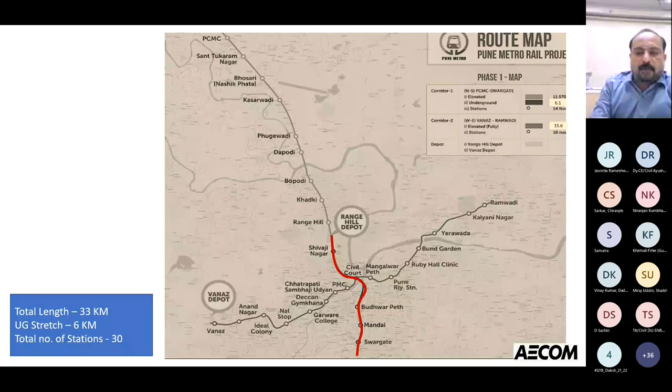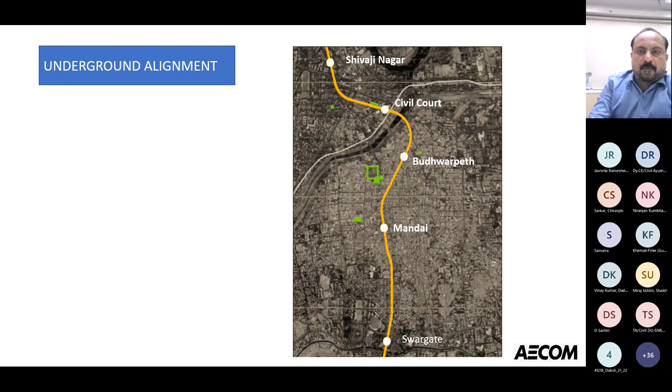So this is how the alignment looks like, the underground alignment in the Google map. You can see that the first station is Shivaji Nagar, followed by Civil Court, and then Budhwar Peth, which is flanked by Mandai station on one side and Civil Court on the other, and the last station is Swargate. At the end of this, after the station, we have a stabling line because it is the end of the corridor. From the Google map, you can see that almost all the stations are located within the vicinity of major and critical buildings.

And you see the station locations: one station is on road, some station is off road, some station is located in the midst of critical and dilapidated buildings. One station is located in a quiet residential area, and one station is located in a market yard. So that is one aspect which makes them different. And the construction access - normally a regular underground station will have 2 or 3 levels, and you follow a bottom-up or top-down construction sequence, using a regular cut and cover methodology to construct the station and backfill.

But here we have stations where we don't have access to build the station. So basically we have split the construction into cut and cover and NATM. NATM is a new Austrian tunneling methodology where we excavate from below into the rock and build the station. So we don't have access from the top. So we do a cut and cover, go to the bottom, and start constructing the station in the horizontal direction.

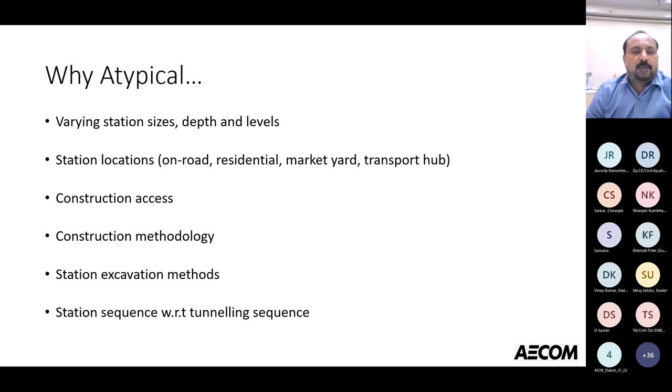Construction methodology is one thing, the cut and cover and NATM, and also the excavation methods. Pune Metro is basically a hard rock area where we had to resort to blasting methods, controlled blasting, and in some stations we could do normal excavation with chiseling. Based on the rock condition and hardness, we deployed various excavation methods. Also, because of the tunneling sequence and delays in land handover, tunneling proceeded first in certain stations, and we had to build the station around that sequence. So different stations have different methodologies and sequences. That's the reason why I'm calling them atypical.

The specialty of the station is, as the name suggests, Shivaji Nagar. The client wanted the entry elevations representing Shivaji Maharaj's culture. So the entry elevations are so designed that it has a historical flavor. And the connectivity of the station with other transport hubs is also one of the peculiarities in this station.

Next comes the Civil Court station. It's the deepest station, with the rail level at about 28.8 meters. Because we had such a deep station, we could add 3 or 4 levels into it, making it a 5-level station. So it's the deepest station, built with the cut and cover methodology.

The specialty of this station is, we resorted to it being basically an interchange station. It is also connected to the elevated corridor. And it's in the vicinity of the district court. It's also near line 3, which is in the proposal stage for Pune Metro, corridor 3.

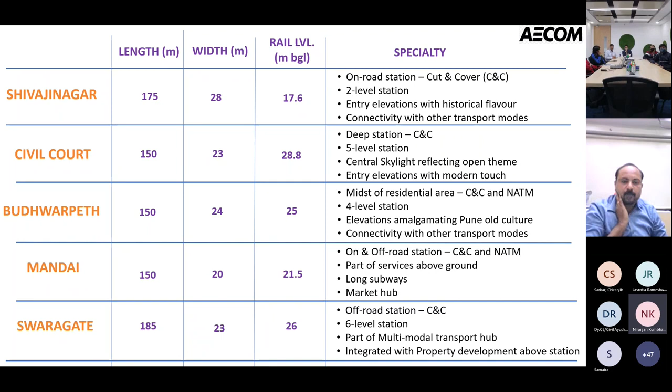The last station is Swargate station, which is again an off-road station. The rail level is 26 meters, and the length of this station is the longest, about 185 meters. It's also strategically located where you can connect to other transport hubs, like the state transport and other options. We also have some property development above and around the station. So if you see this slide, you will understand that each station is so different from the other.

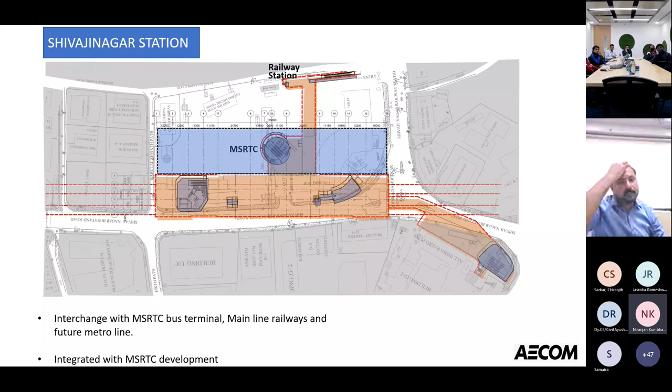This is the first station, Shivaji Nagar. The red highlighted area is the main station, and the blue highlighted one is the MSRTC, the Maharashtra State Road Transport bus terminal. It's connected with this terminal, and the entrances are designed so one goes to the railway station on top, and another is near an AAR establishment, a government office. The specialty of this station, though it's a regular two-level underground station, is its connectivity with the state transport and the railway station.

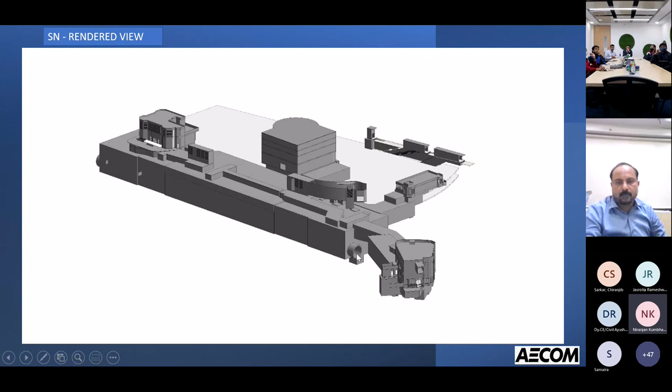This is a Revit 3D rendered model, which gives an idea of how the station will look. Though it's black and white, it gives an idea of the 3D-ness of the station. This is the entrance AAR, and this is the other entrance connecting to the railway station, and this is the interchange point with the state transport. This is the two-level station, and you can see the tunnels connecting to the end wall of the stations on either side.

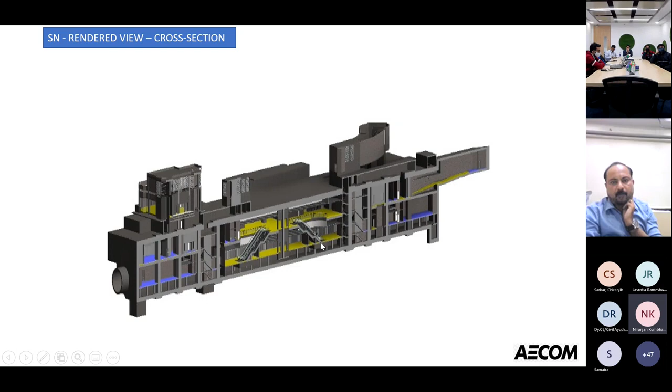This is another view of the same station, a cross section cut through the 3D rendered view, created in Revit. You can see the main public area, the fare office, and the entrances leading people from the concourse to the platform. There are some shafts going above the station, and this is the ancillary building coming above the roof slab. Partially all this area is under the road.

We have adopted a historical flavor in the elevations. These are the proposed elevations for the station, with about 3 entrances. You can see the historical tinge, like the forts in and around Pune have this kind of color, texture, and shapes. The circular or dome shape is picked up from the Pune forts.

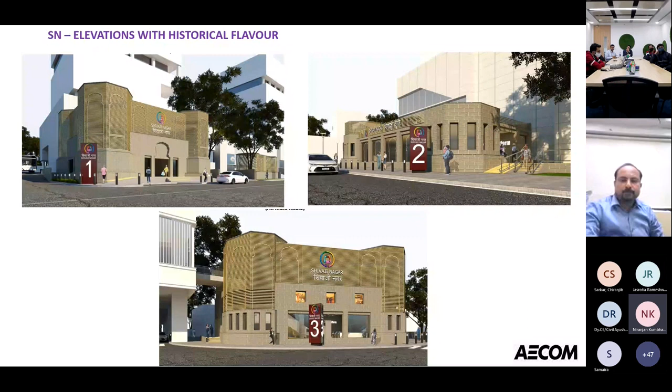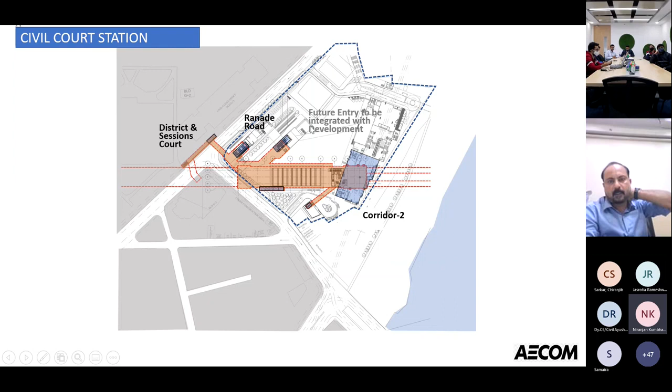The next underground station is Civil Court. This is also better connected. As I said before, this is near the district court, that's why the station is called Civil Court. We have entrances leading to the nearest roads, and some future entrances planned for future development.

This is the cross-sectional view of the station. The rail level is about 28 meters below ground. This is almost the plinth of the ground level, and this is the rail level. We have levels 1 through 6: the undercroft platform, mezzanine, 3 mezzanines, concourse, and the roof level. Because the station is deep, we could add some levels, and at some levels we are reserving spaces for property development.

The main theme of this station is that we wanted a grand look. All the area in the middle, about 50 meters long, is open to the sky, with a skylight arrangement at the top giving an open feeling. There's a mid landing through which the public will reach the platform from the ground level.

The only problem was with the structures. We had a structural design challenge because of the long, deep retaining walls, due to earth pressure at about 30 meters below ground. These walls have to resist earth pressure, with little lateral support, which we got from some struts at the top and the mid landing level. These walls are quite thick, about 1.7 meters at the bottom, with varying thickness at the top. Architecturally we wanted it to look grand, but that posed some structural challenges on the design.

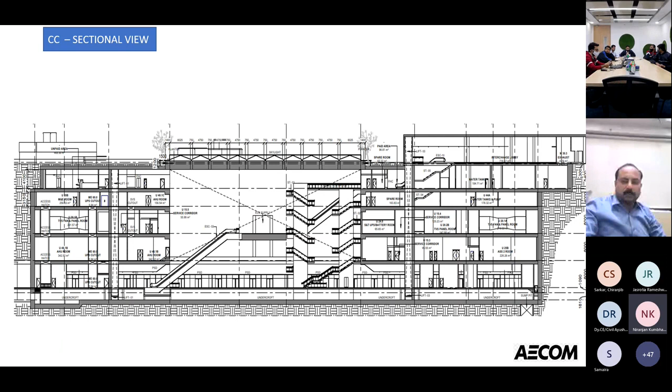Yeah, this is the 3D view which you can see. I can briefly explain. Actually, we have a crossover in front of the station, and there is no access from the top, so that's the reason we built it through NATM methodology. So this is the crossover, and the station starts from here up to here, and from where the tunneling starts.

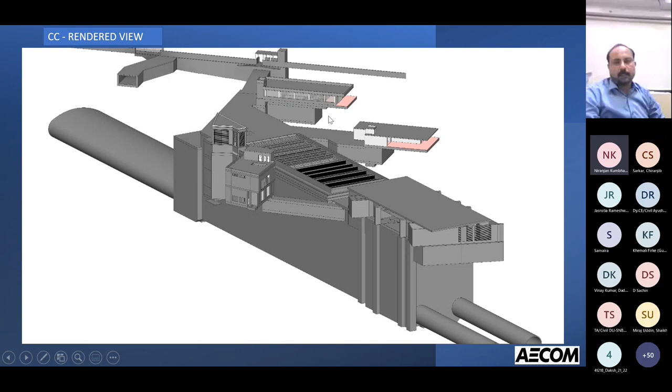And this is the skylight which gives an open and grand look at the center. And these are the entrances which are connected to the district court, and the subway is connected to the nearest court and the future development. So these are some other views, better view on the right.

You can see the openness, feel the openness in the station. So the people getting down from the ground will come to this mid landing level, use this winding staircase or the escalators, and go down to the platform.

So yeah, this is the view of the skylight at a certain angle. That gives you some openness. And this is the view which is cut through the 3D model, which I've shown in the previous slide.

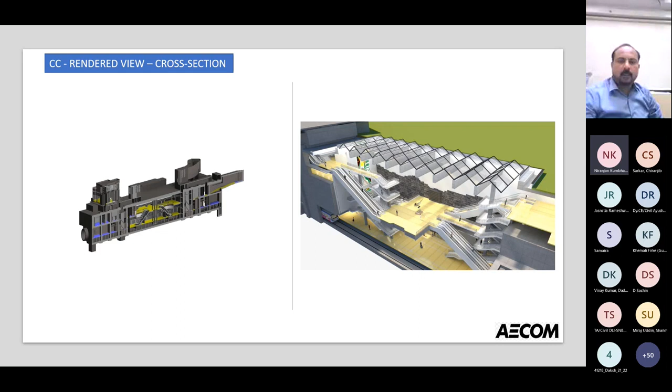So Civil Court station, this is the specialty: openness and a deep station, more number of levels. And within the levels, we could use it for property development and connection. So the entrances here had some design because we had offices close by and the district court and connectivity to the future development.

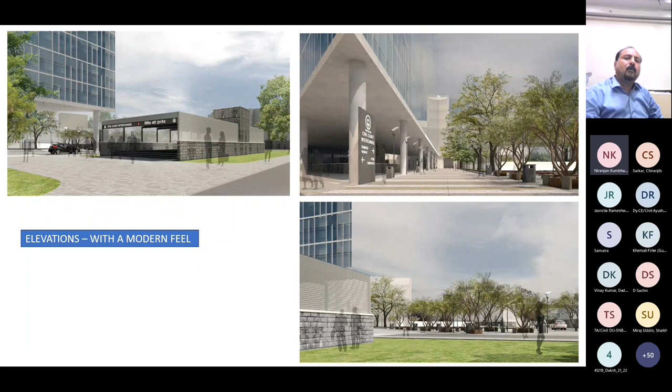The client wanted a modern feel to the entrances. So this is how these entrances were proposed, with glass and some open atrium kind of thing. So the previous station had historical flavor in the elevations, while this station had some modern feel.

Resort to controlled blasting because manual excavation or mechanical excavation would take a very long time. So we made sure that they adhere to the PPV limits for vibration and also the noise.

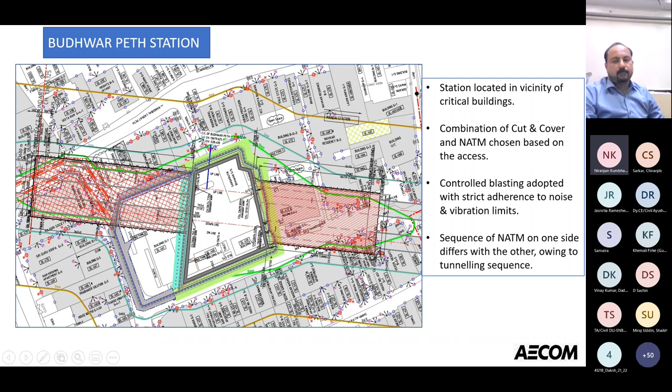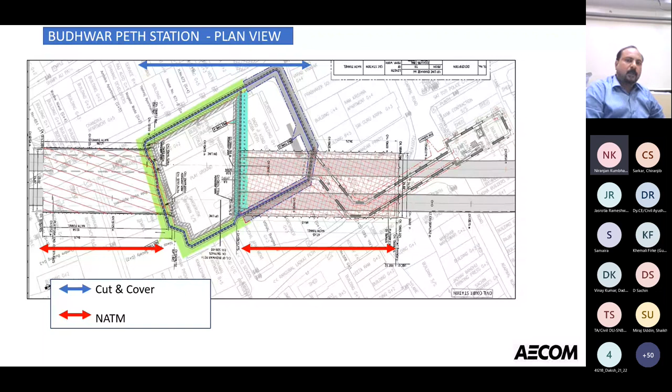Yeah, this is the plan view of the station. The blue portion is the cut and cover, where we could get some access from the top and build like a regular cut and cover with secant piles and going down to the bottom of sequence. And the red ones are the NATM portions.

So if I cut a section through this, this is how the section of the station looks. Yeah, the central portion is the cut and cover, and we could build some secant piles and dig up all the way through to the bottom, and then started constructing the NATM on either side.

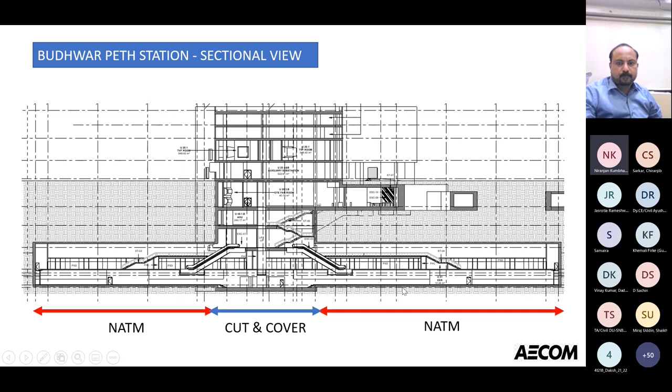Yeah, so this is the section which looks like in the NATM portion of the station. This is also part of the station, but because NATM's maximum depth is like 10 to 11 meters, it could only reach up to the platform level.

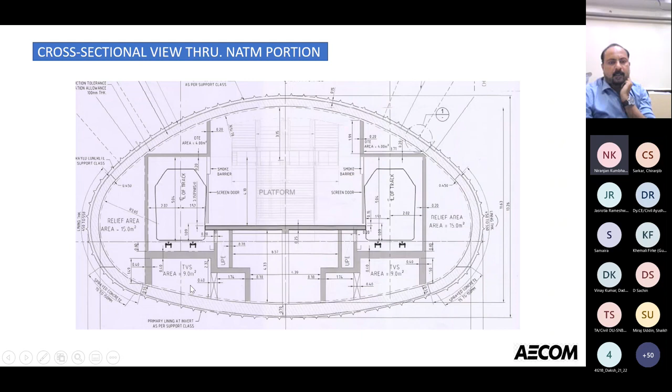So the difference compared to the other stations is that the platform, the track slab, is suspended in this case because we wanted to accommodate some TVS shafts below this track slab. Compared to other stations where the track slab is normally supported on the underground undercroft, this is the arrangement we have in the NATM portion: the platform and the suspended track slab, with the trains and the platform.

Briefly, I'll explain the sequence followed for constructing the NATM portion of the station. I won't go into details, just give you a brief sequence. This is the entire NATM shown in the previous slide, and to construct this, it's basically split into 4 stages: heading 1, heading 2, heading 3, and the benching.

This is the first stage where this portion of the NATM is targeted, and it's built with NATM taking appropriate support measures. Once this is done up to a certain extent, we build heading 2, and once that portion is dug and constructed with adequate support, heading 3 is done. Once headings 1, 2, and 3 are done, we target the bench and construct that NATM portion.

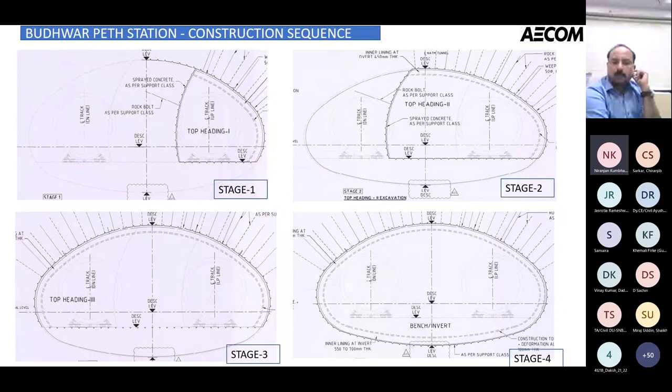So NATM basically has a primary lining, which is a temporary lining with shotcrete, some rock bolt supports and wire mesh, and we also have the permanent lining, which will be in concrete.

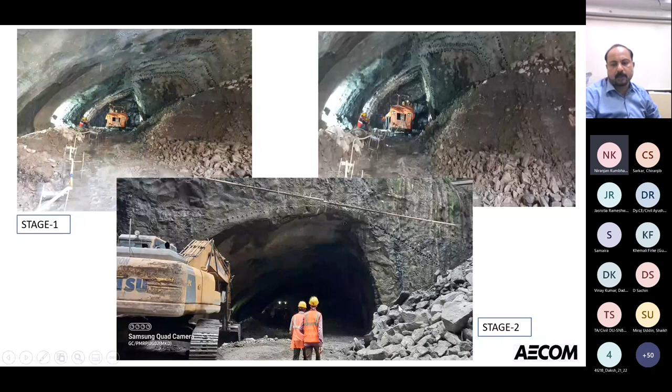These are some pictures which give you an idea of how the construction is going on. This is stage 1 where heading 1 is done for the NATM portion, and after heading 1, heading 2 is done, and this is the heading 3 portion which is yet to be constructed. These are work-in-progress pictures.

As I said before, because there was a delay in handing over of land, a certain portion of the NATM could not be constructed. One side of the station, one part of the NATM, could not be constructed in time, and the tunneling had proceeded before, so they erected temporary segments. Because of this, they slightly changed the sequence of the NATM.

This portion was constructed first, dug first, and the temporary segments were removed, and this portion has been constructed up to a certain extent. Once heading 1 is done, in the second stage heading 2 is targeted, and this portion was done to have some stability in the middle. This portion is constructed last out of the 3 stages, as heading 3. Once headings 1, 2, 3 are completed, the benching is done. So there's a slight variation in the sequence of the NATM within the station itself.

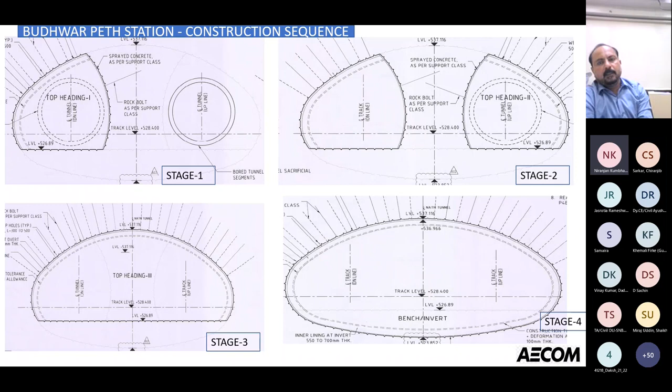On one side you have a straightforward 1, 2, 3 sequence for constructing the NATM, and on the other side we have like 1, 3, and 2.

This is the sequence for the other side. Once they start heading 1, they have the temporary segments erected through the TBM tunnel, which are broken out, and this is extended to build the NATM portion.

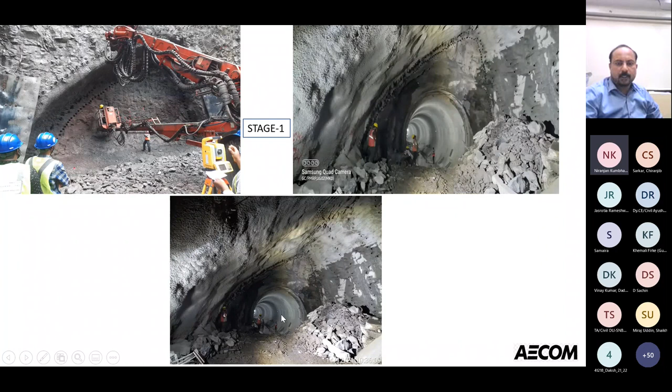Some more pictures show with more clarity the central column here. If you can see, this is the central column. This is heading 1, heading 3, and then this is constructed. This is excavated.

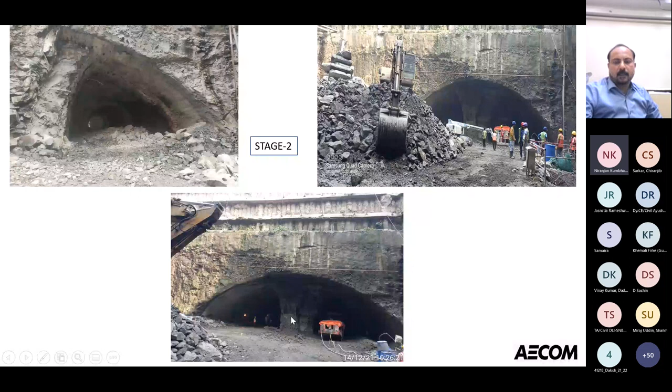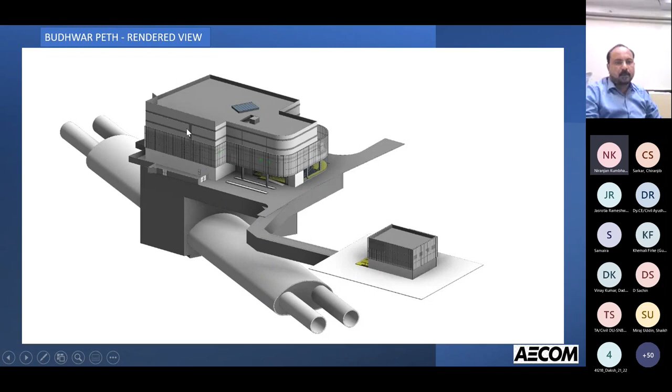This is another view, cut through the 3D model. You can see the tunnel getting terminated at the NATM, and the NATM starts from here up to the cut and cover portion, with the cut and cover box in the middle, again followed by NATM and the tunnel. There are some services above the building, and some property development is also proposed for the future, though it is shown in the model.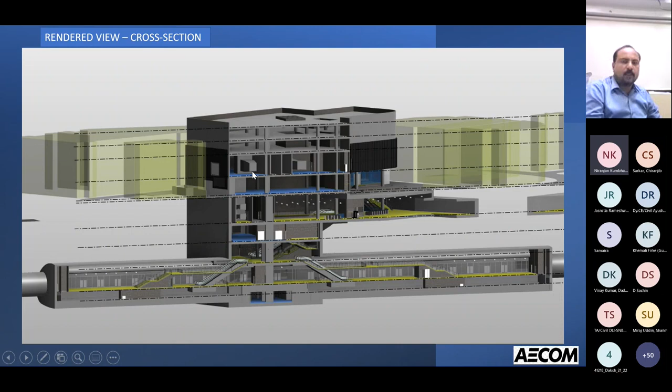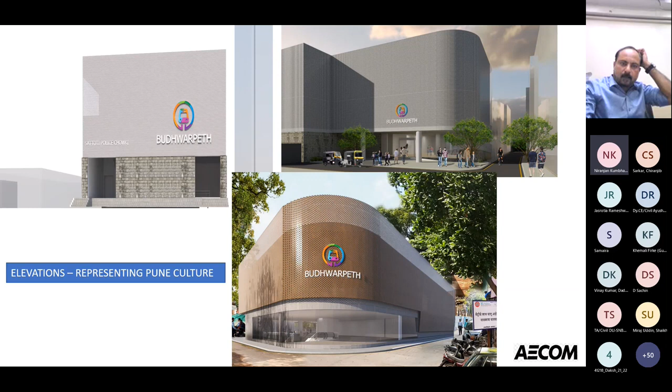These are only the proposals at this stage, though they may get refined further. So this is the elevation proposed for Budwarpet. The next station is Mandai station, which is almost like Budwarpet in terms of combination of cut and cover and NATM.

But the only difference is the cut and cover portion is split up into two, and it is also very limited. So you can see here, this is the whole station. This portion where my mouse is moving is the cut and cover portion, and also this is a cut and cover, which is followed by NATM to the right and to the left of this box.

This again, here you can see that there are a lot of buildings in and around the proposed station, and also a major market hub around the station. So here also the sequence of NATM on one side and the other side was followed, and the blasting and all were carried out with adherence to all the strict limits which we have.

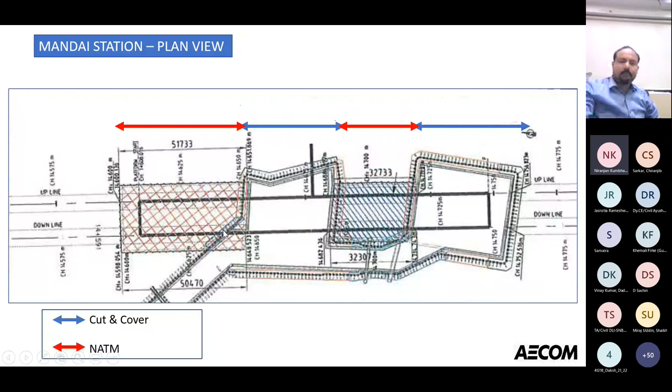This station, as I said, is also located in the vicinity of critical buildings and the major market yard. For building the station, we had to use a combination of cut and cover and NATM, and blasting was adopted, but with strict adherence to the limits of noise and vibration.

Also here, because there were some delays in handing over of the station lands, the tunneling proceeded before, and the sequence of NATM had to be modified around the tunneling operations. The other specialty of this station is, as I said before, the cut and cover portion - the boxes - the size is not same as what we had in Budwarpet.

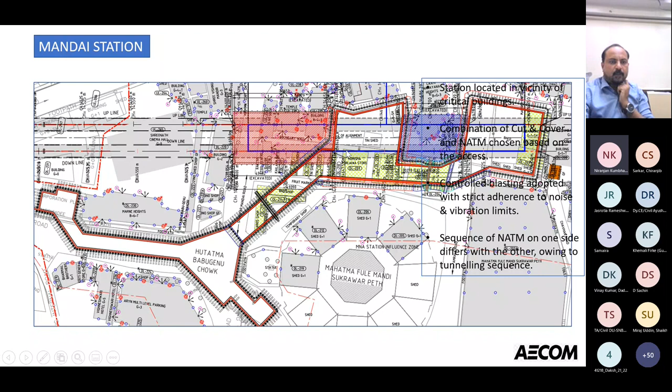In Budwarpet, though we had a small portion, the area was enough that we could accommodate all the services within the underground box. But in Mandai station, we did not have that luxury, so some of the services had to be shifted to the top. So this is like a partially underground and above ground station.

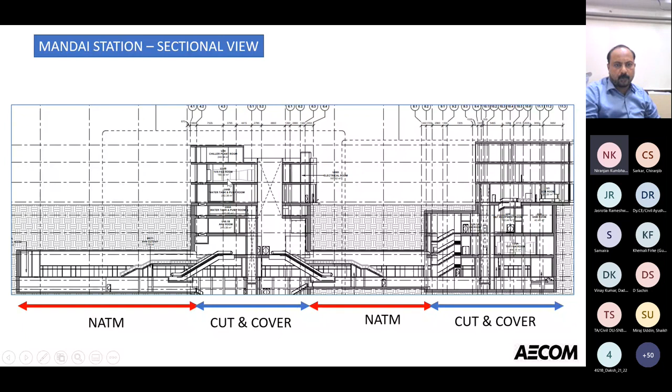Now this is the sectional view of the station. The middle portions, the blue portions, are cut and cover boxes, flanked by NATM on either side in red color. As I said, you can see the fans housed on the top floors, above ground floors, which is not the case in other stations.

So we have to have this long subway, which is an additional cost, but there is no other way because we could only accommodate one entrance here and there was no facility to accommodate the other entrance. Normally we need two entrances for an underground station, so we had to have one entrance which is closest, but connected with a long subway.

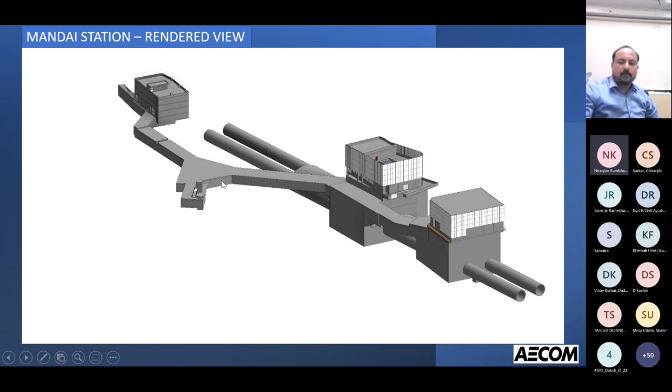So the platform slab with the UPS walls is supported, originating from the secondary lining or the permanent lining of NATM, and the track plinth can be supported on PCC, with the track plinth built in first stage and second stage.

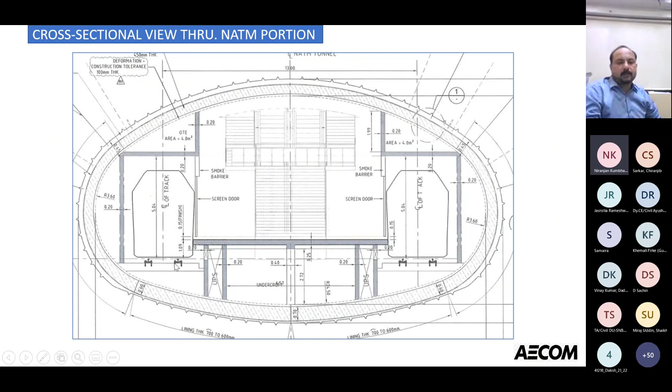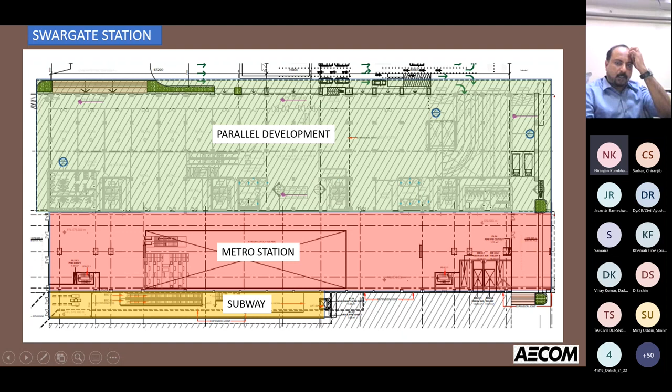And if you see in the cross section, yeah, this is the metro station in magenta, and for the metro station itself, there is a property development above it. So this structure had to take in the loads of the future development above the station. This is the MMTH development happening just next to the station, which has 3 or 4 floors below ground and some stories above ground.

So the challenge is that it is integrated, but the design and construction is segregated. The metro station is constructed by one contractor, whereas this MMTH development and other developments are being handled by other contractors, and the construction has to go in tandem. So there are a lot of interface issues in design as well as at site, which have to be navigated through before starting construction.

So now the construction is going in parallel for the metro station on one side and MMTH on one side, and these are future developments. There is also another development happening at the same time, which is the terminal being created for Pune municipality buses.

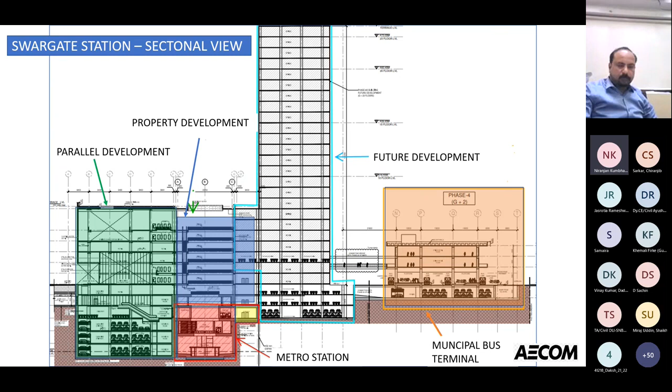Yeah, some of the salient points of the station. The station is strategically located around the major transport hubs, which gives it major importance because it is connected. As I said before, parallel and future developments are happening, which impose structural challenges to the metro station, not only to the metro station but to the developments happening, and that is vice versa.

There are open spaces adopted while doing the architectural layout, in the middle of the station, which gives an open feel. There are large circular openings in the middle of the station. I'll show you some slides which justify that.

Also, there is an integrated seamless movement between various transport hubs. This is MSRTC, that is Maharashtra State Transport. This is the station and transport hub being created, and there is another subway connected to the other side of the road. And as I said, there is also another development here, like the Pune municipality bus terminus.

So all these transport hubs have been integrated through subways to have seamless connectivity for the passengers. Passengers from MSRTC can get to the station, or to the mall, or the property development, or to the PMPML, Pune municipality, or just cross the road to the other side. There is also a flyover already existing on this side. So this is basically a major transport hub which has imposed a lot of challenges on construction and design, leading to a lot of interface issues, though they are sorted to some extent now.

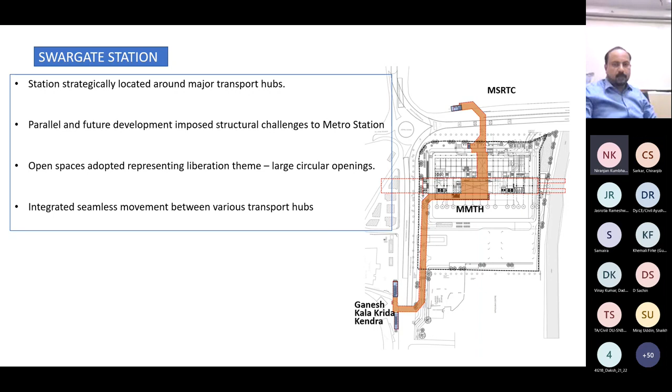This is the longitudinal section of the station, Swargate station. Here you can see in the middle portion there is an open skylight, opening with a varying size towards the top.

There is a future development proposed which will be built now, and that will also have some openness in and around this skylight. So there is only movement of people here, which gives an overall openness to the entire development. These are some 3D views which show the skylight from different angles.

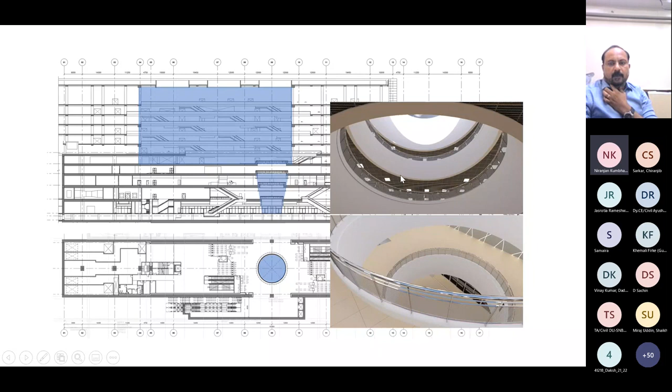Yeah, this is the 3D model, which you can see again, like Civil Court. There is a crossover in front of the station, again built to a NATM sequence. This is the one followed by the station. And we have some stabling lines, which are also small horseshoe shaped NATM tunnels, projecting out beyond the station for about 180 meters. This is the subway going all the way and connecting to the other road, and this one is just adjacent to the road. So the MMTH is not shown, but this is the station model per se.

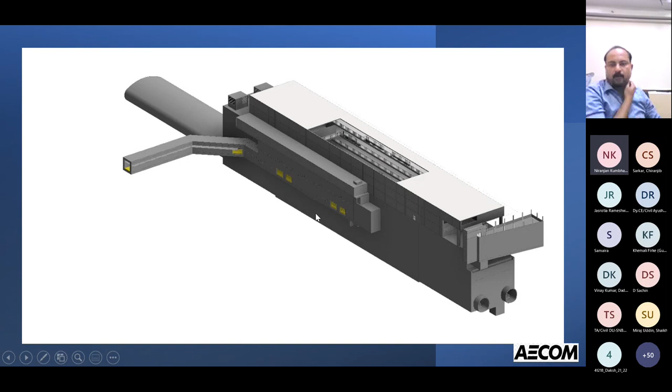This is the picture, the current picture, which shows the entire development. So this part is the metro station.

The entire development excavation has been done with secant piles, with 4 or 5 layers of anchors, ground anchors, followed by rock excavation with a certain slope in the hard rock. Once that is done, as I said before, there are 2 contractors involved in metro and the development adjacent to it. So this is the metro station which is getting developed. This is the undercroft level, and at the next level, this is the development, a building coming up next to the station.

So we had this challenge, the interface at this location, where the metro station retaining wall is just abutting the MMTH, or the parallel development retaining wall. That is one of the challenges we faced.

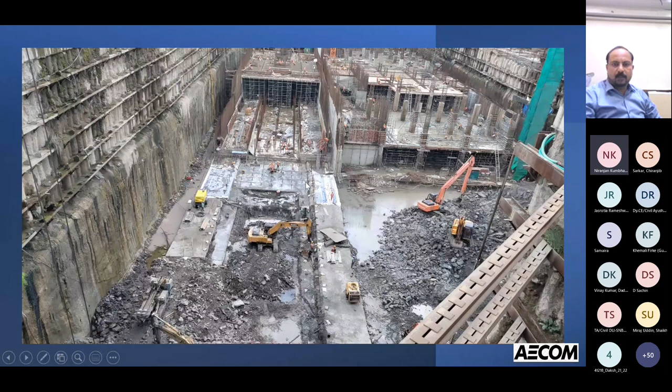So this is what I have for today. I just tried to show that though we have 5 stations, all of them are different in respect of various aspects like geometry, construction sequence, their connectivity, their elevations, and all.

And I have a video which has a collection of pictures which will be interesting. I can stop the presentation after this video.

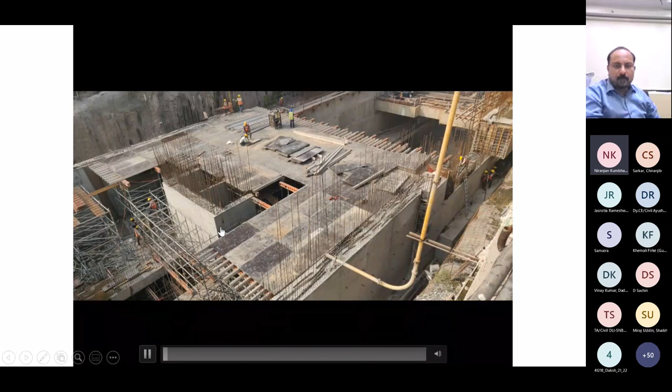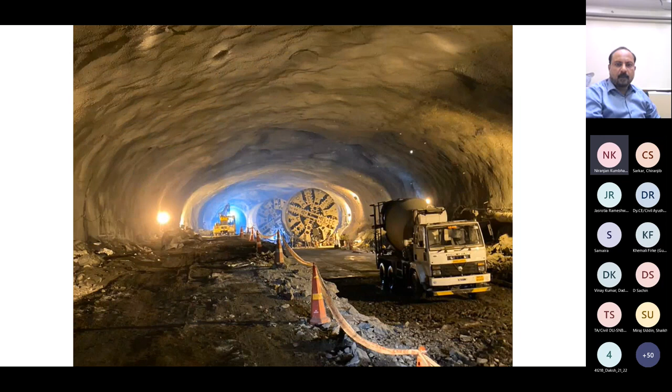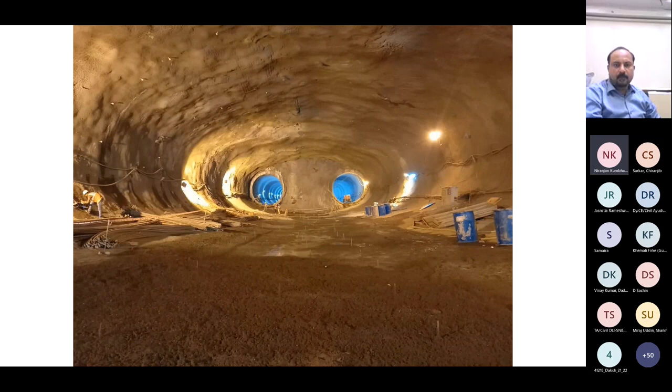So this is one of the stations, Kasturba Road station, Shivaji Nagar station, which has 2 levels of undercroft, and this is the crossover in front of the Civil Court station where the TBMs were retrieved and placed there. So the primary lining is in. This view shows the tunnels. This is the shuttering they are doing for the secondary lining of the same NATM crossover in front of Civil Court.

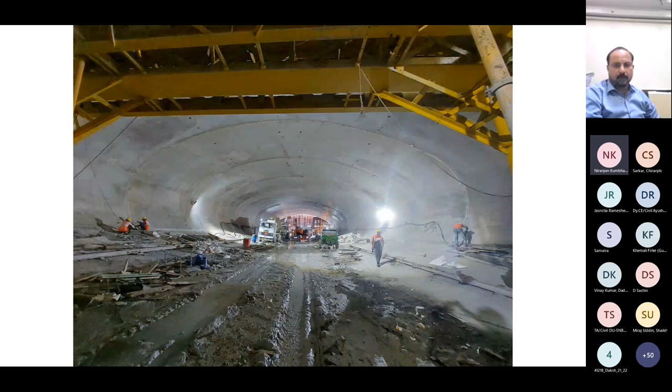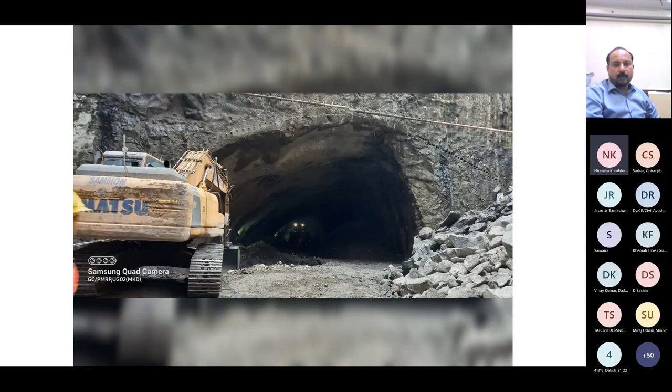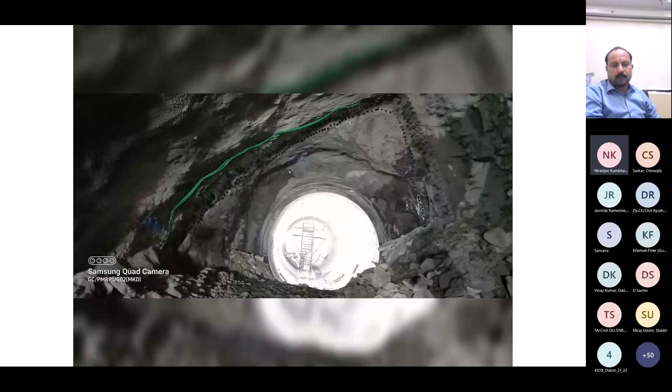This is the completed lining, and this is the construction they have started for the NATM portion in Budhwar Peth, like heading 1 and heading 2, with heading 1 having proceeded quite inside. Another view of the same. This is the sequence where the tunneling has proceeded before, and you could see the segments there. This is the portion where tunneling has proceeded and the TBM is retrieved.

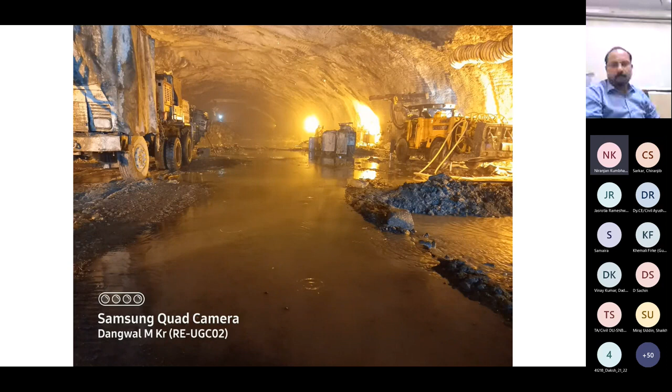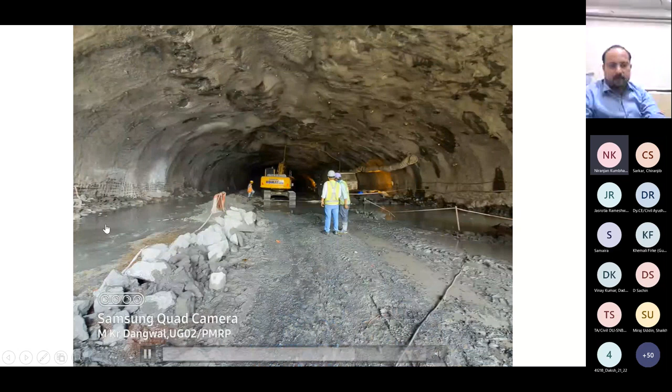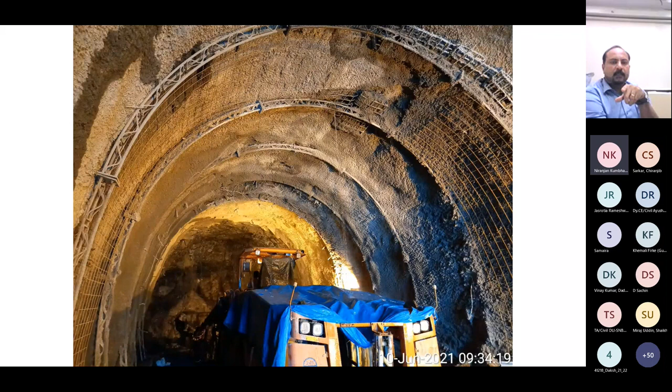This is the crossover at Swargate in front of the Swargate station, general view. Sorry about that. So this is another crossover, the primary lining is in with some supports. This is the Swargate station where the transport hub is being built, with the metro station in parallel. This is the stabling lines with primary lining after the Swargate station.

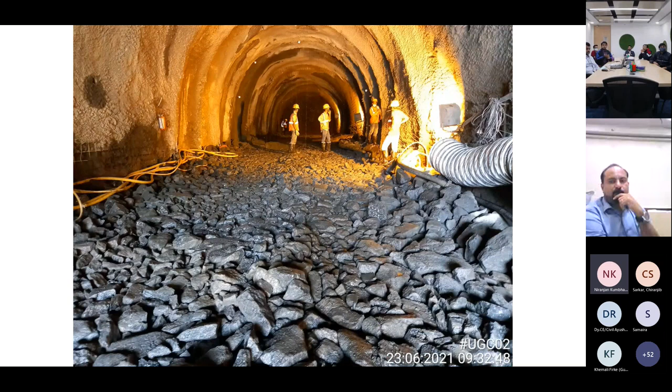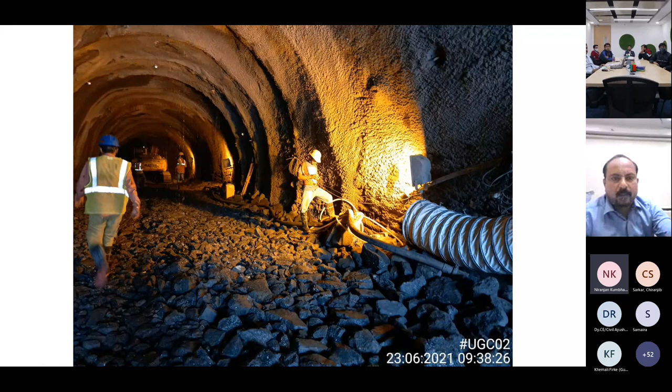You could see some lattice girders installed as part of primary support. That's the last picture in the video. So with that, I come to the end. Thank you, thank you very much.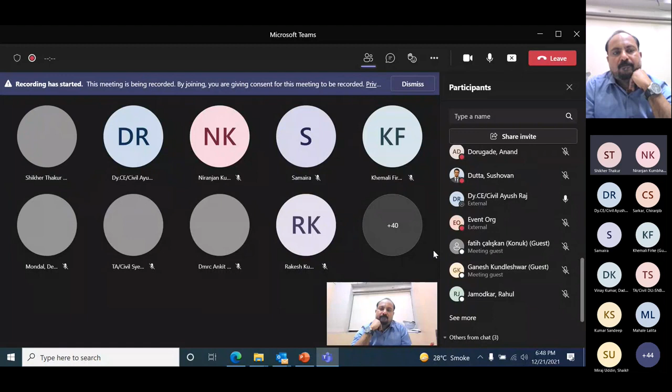No, for tunneling, we did not have any major surprises, but for NATM, in one crossover we had the rock as anticipated in the design. But in the other crossover, we have 2 crossovers through NATM. One crossover was okay, the other we had issues of seepage, but not faults or any big surprises as such. We have the issue of seepage, which we are addressing through grouting to a certain extent, but we could not address it completely.